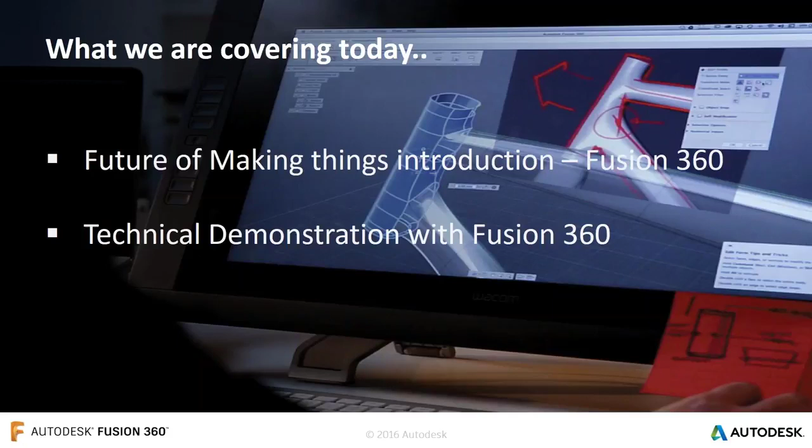So just a quick overview of what we term the future of making things. We've visited a lot of our customers, and a lot of our customers work in a very similar way to each other. They start off when looking at product development with a concept phase.

So these can be, pardon the expression, fag packet sketches. They could be very quick concepts, maybe some rudimentary 3D models. They then move this into a more production level design, adding all the dimensional constraints with the product itself, looking at creating all the drawings, PDFs, bills of materials.

Then they move this into production, so this could be a mixture of what we term subtractive manufacture, looking at CNC manufacturing of components, or even going down the process of mainly assemblies and bits and pieces itself. We then move this into selling that product, and then finally operating and retiring that product.

Now, with that, we can quickly and easily see that it's a very linear process to the design itself. It's very structured in its nature, very siloed in each of the actual products itself. We term this here a traditional product lifecycle, and it has what we term a fixed product value, because around the selling, operation, and retire phase, we're having to rethink the concept, design, production phase, since we're having to rethink that next generation of product.

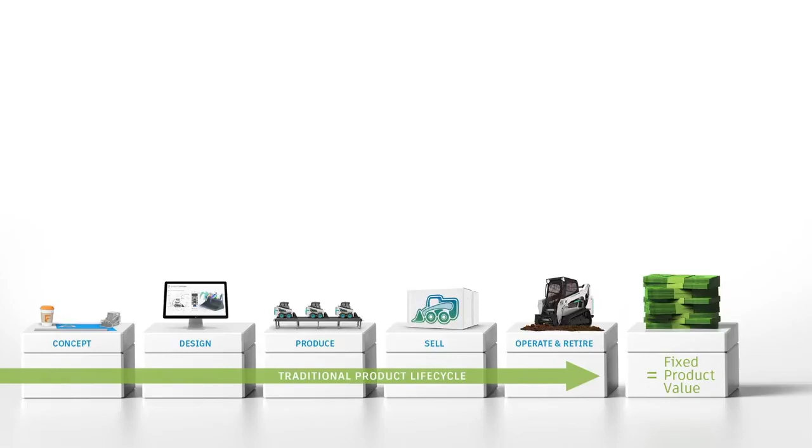Now, here at Autodesk, we look at this a little bit differently. During that concept phase, we have a bit more of a broader reach, so we can go ahead and customize the product a little bit easier to what that customer would like, whether that's color changes or small changes to the product to suit that customer.

We can then go ahead and use virtual teams. They don't have to be in the same geographic location, they could be dispersed around the globe, but we can quickly and easily start to collaborate with them, bringing in ideas from manufacturing, from production, from sales, to quickly and easily start to develop the next generation of product.

We can handle flexible manufacture, so not tying ourselves down to the route of subtractive manufacture, but also bringing into account all the 3D printing enhancements that have been happening recently. So having the ability to maybe metal or additive 3D print something and run some final machining toolpaths on that.

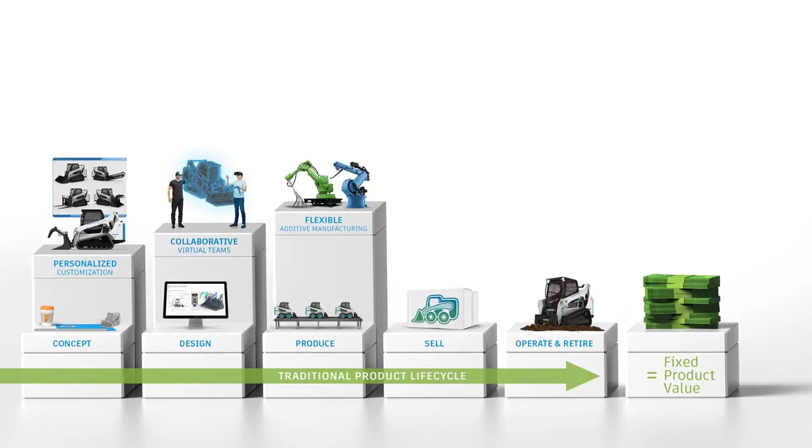Moving this into the sales phase, the customer's a little bit more engaged and the product's a little bit more personalized to them because we've customized it at the start. And finally, having the ability to connect that product to IoT and Industry 4, and having the ability to look at that product, how it's being used in field, to then go ahead and inform the next generation of product, or even start to look at some preventative maintenance.

So this gives us what we term product as a service. We're not just selling our products anymore, we're also selling the services that go with it, with regards to stuff like preventative maintenance and also data capture. And it gives us what we term an increased lifetime value, because all of that data that we capture from that product within field, we can start to plug back into our design at an earlier stage in the process, giving us the future of making things.

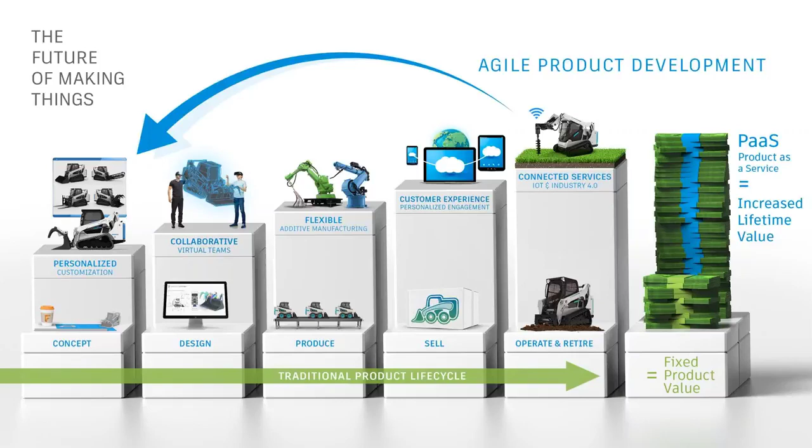Now, with that, all of this sits on what we term the product innovation platform. We can start to work with those design silos.

So starting to look at concept design, we can then go ahead and move this into production, start to look at PCB design, how we can then push that into mechanical CAD instead of leaving that within ECAD. Having the ability to virtually test something, moving this into the make space and actually create that product, and then finally the use phase and connecting that product up to IoT and Industry 4 to quickly and easily go ahead and start to inform that design decision a little bit sooner.

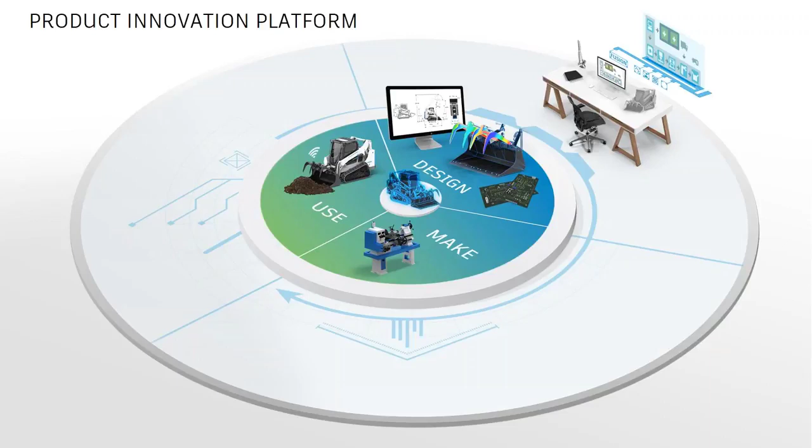From here, what we can then go ahead and do is start to build on that. So bringing in those collaborative teams during the design process to quickly and easily start to get that very quick and easy, or a broader reach, so we can go ahead and have a detailed manufacturing process further down. We can again bridge that gap, like I said earlier on, with additive and subtractive, having the ability to quickly and easily use that bridge between 3D printing as well as our standard techniques such as subtractive manufacture.

And looking at IoT, not just analyzing the product while it's out in field, but also analyzing how the product's being manufactured while it's still with us, and starting to look at machine utilization and how we can then go ahead and make sure that we're getting the kind of throughput that we need from our production floor.

So giving us a really detailed platform of products that we can go ahead and start to look at generating this next generation of product. And this is what we term an integrated product development platform. So a single platform to take our design from concept through to production, what I like to term art to part. And you'll hear me use that often within the webinar itself.

So we start off with form, so we can quickly and easily start to generate those concept models, move this into functions, start to create those production level designs that we need, 2D drawings, check for fit, form and function. Move this into fabrication, so obviously manufacturing the product, and finally managing that and making sure that all the versions and bits and pieces are captured as we go.

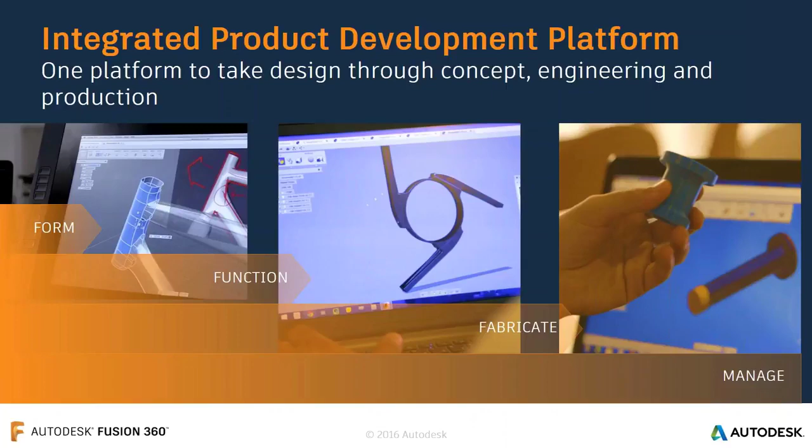Now, just a bit of background on why we built Fusion. We went out to our customer base in the actual market and said, okay, what do engineers and designers want from that next generation or next level of CAD tool that they're going to be using?

One of the key things that we found was that they wanted access anywhere. Now, traditional CAD ties you down to a specific set of hardware, and you're tied to that machine, maybe in your office or even a laptop. Instead of that, Fusion 360 works on Mac as well. So you don't actually have a device or a set of hardware specs that you really need to tie yourself down to. From here, we can run Fusion 360 on a Mac as well as a mobile device as well, and we have the ability to work anywhere and at any time.

Fusion is what we term hybrid cloud, so we can quickly and easily go ahead and access our data wherever we are within the world, and we don't actually need our laptop with us to do that. We can quickly and easily start to view and start to look at how that data is moving on within our design teams.

They also wanted us to have a bit more of a connection with different teams. Now, generally what we saw is our design teams are kind of siloed, and then when we move it into manufacture, some design changes need to happen, and it's generally either a set of notes, a piece of paper, or someone knocking on a designer's shoulder to say, look, these changes need to happen because of manufacture.

That's the reason, two of the key reasons why we built Fusion 360. It gives us an integrated platform, which we'll show you in a second. It gives us the ability to connect a whole host of virtual teams within Fusion or within the business, and also gives us accessibility anywhere in the world. So it gives us that complete 3D CAD that we need when we need it, on demand.

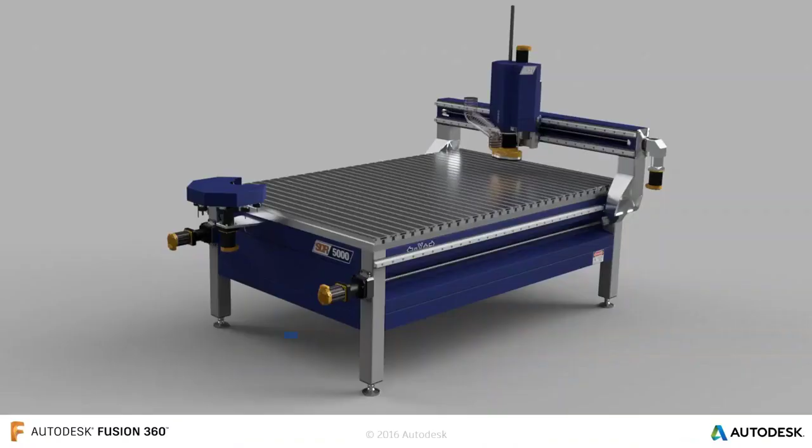So let's jump into the technical demonstration of Fusion. We're going to concentrate this demonstration on the new functionality, sheet metal, which was released on August 8th this year. We're going to focus on some key areas. We'll look at this router table, and specifically the actual router head, and create the sheet metal components for this section.

So these areas just here: the cap at the top, this front sheet metal component, and this one at the bottom as well. We're going to look at how we can use this within Fusion itself.

We'll initially look at the sheet metal functionality, how we develop a sheet metal component within Fusion, some of the sheet metal tools within Fusion. We'll look at some of the rules, how we can override those, creating flanges and bits and pieces. We'll then move into what I mentioned before, our communication layer.

How we can communicate this design out to other people within the organization. We'll then look at how we can take that design and use some of the simulation tools within Fusion to quickly and easily test the design and make sure it's fit for purpose before we manufacture.

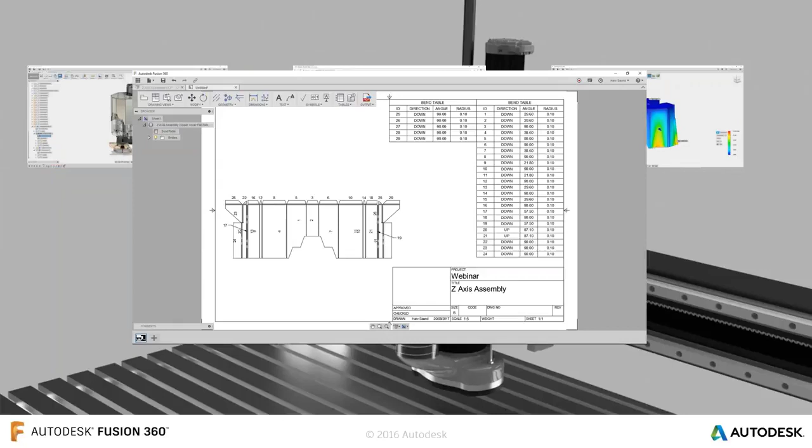We'll start to look at the flat pattern and the actual drawing, creating the bend table within Fusion as well — a real quick and easy way of doing that. We'll move this into the render space, so we want to create a nice visual for our customer, and we'll go ahead and do that.

And then finally, we're going to finish up with the CAM, looking at how we can manufacture that product. So in effect, what we're going to do is take a design from art to part, giving us that complete area we can then loop through.

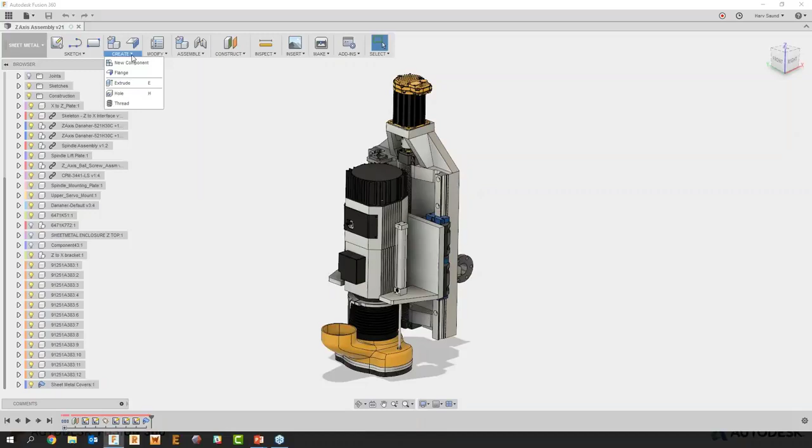We start off with our sketches on the left. We then have the option to create new components and flanges. We have the ability to look at sheet metal rules. And if I expand each of these, you'll see specific sheet metal tools, such as unfold, and also the option to create a flat pattern. So I'm going to go ahead and start off — I've already created a quick sub-assembly for our sheet metal covers just here.

And there's a reason why I've done this, and I'll show you later on. But first thing I'm going to go ahead and do is create a sheet metal component.

You don't have to do this, you can just start off with a sketch. But I like to organize my browser on the left-hand side of the screen, so that's one of the reasons why I'm going to do this. So I'm going to call this upper cover.

At this stage, I can start to specify the sheet metal rules that I want to use. We have a standard library of rules that we can work with, or we can have a couple of customized rules as well. Each of these will start to look at specifying your thicknesses, K factors, bend allowances, conditions for the bend, relief statuses, and bits and pieces.

So I can set these just here, and I'm going to set that for this design. But if I want to modify any of those, I go up to my sheet metal rules, and from there we can start to see steel, aluminium, we have a library, and then you have the option to edit or even create a brand new rule.

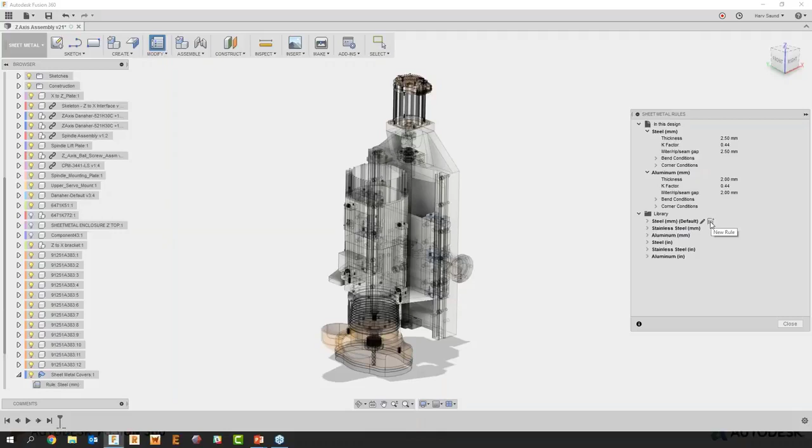So you can set this to the machines that you guys are using. So if you're going to be using specific press brakes, you can go ahead and work with those with the tooling that you've got for those press brakes.

For this design, I'm going to start off with a sketch. I've already created a few sketches that I'm going to use, and I'm going to snap to a top view so you can see the sketch. This is the sketch I've created, just a couple of offsets from a couple of edges of the design so that we can capture the absolute outside limits of that design. Using this sketch, we're going to quickly create that first sheet metal component.

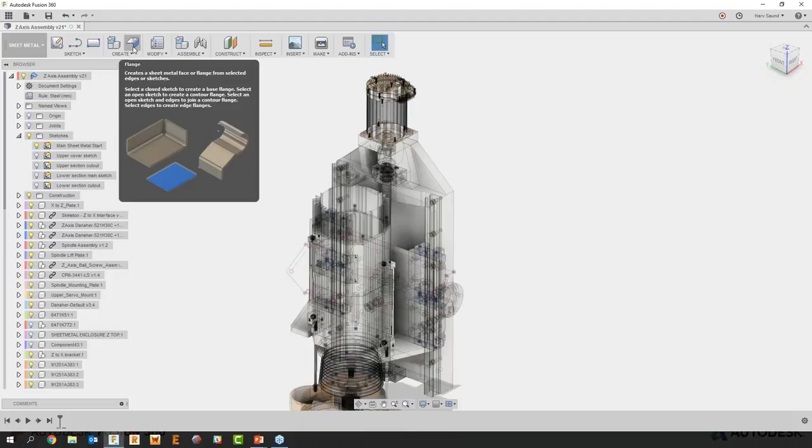And we have a single flange tool to do that. Our flange tool will start to look at creating base flanges, contour flanges, open flanges, edge flanges, so on and so forth.

So if I pick up on our flange tool and specify a contour or a sketch edge, you'll notice that it's open, so you don't actually need to have a closed contour to create the first flange itself. You can quickly and easily, very visually, grab and drag and start to create the flange that you want to use.

Now I want to snap to a specific height because this flange is going to finish at this face here. As soon as I hover over it, it will give me a size that I'm going to snap to. So I'll snap to that.

And I can also go ahead and set a value for this. So I'm going to call this -12.5. And from there, I've hit enter, and we can start to see that flange being created.

I can come back here, edit the feature, and we can start to specify some extra options. You can also do this when you go ahead and create the flange. I was just a little bit too quick with my enter key, so I pressed enter the first time round.

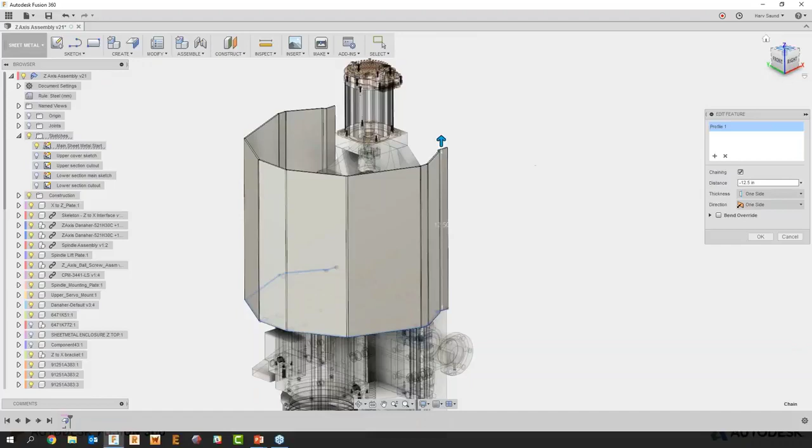So let's go ahead and set a couple of options for this. At the moment, the sketch itself is sitting on the inside, and our flange is sitting on the outside. Now I actually want the flange to sit on the inside of that sketch. So on the right-hand side of the screen, I can specify my thickness direction - whether this is on one side, whether it flicks to the other side, or whether it's symmetric, so the sketch sits in the center of the actual flange itself.

That's totally up to you how you want to do that. I'm going to go for the other side, so it sits flush with the actual component itself. And then at this stage in our dialog box, we have the option to override the bend radiuses as well, and again we have the option for extrusions and bits and pieces. So it gives us the ability to very quickly and easily specify that first flange that's being created within Fusion.

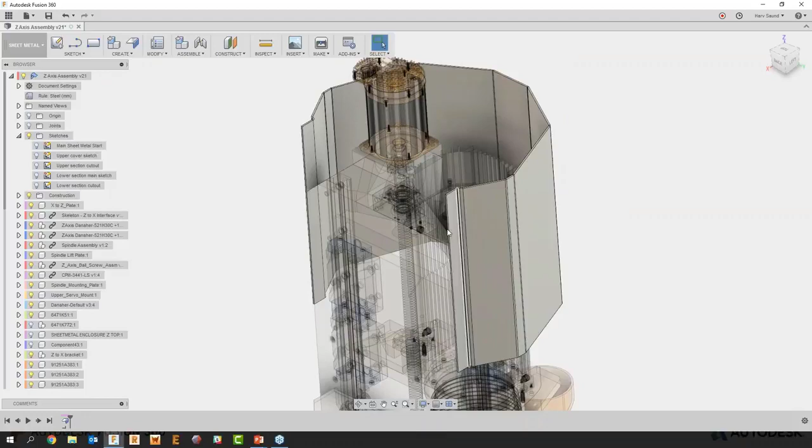So great, we've already started to create that sheet metal component. Now one of the key things I want to do is take this component and make it a little bit more complex than it actually is. I want to grab a flange on this edge, and as you can see we've got a slope on this side at the back just here, so I want to match that slope and create a flange that's just in this top section. I'm going to go back into that flange tool.

If I right click, I have my flange tool on my gestures menu, and from there I can pick up a couple of edges just here and here. With that I can just grab the arrow and drag. Now I like to do things visually, and as you can see with Fusion, you can do it very visually. Very quickly and easily you can start to create those flanges.

Now they're going the wrong way, I want to flip them. I have two options: on the right hand side of the screen I have the flip option, so I can flip that the other way, or I have the rotation ring that I can use. This is very useful, and I use this more than the flip option, because I can actually visually see if I want an angle on that design. Very quickly and easily it gives us an easy and visual way of utilizing that. A great tool just there for Fusion.

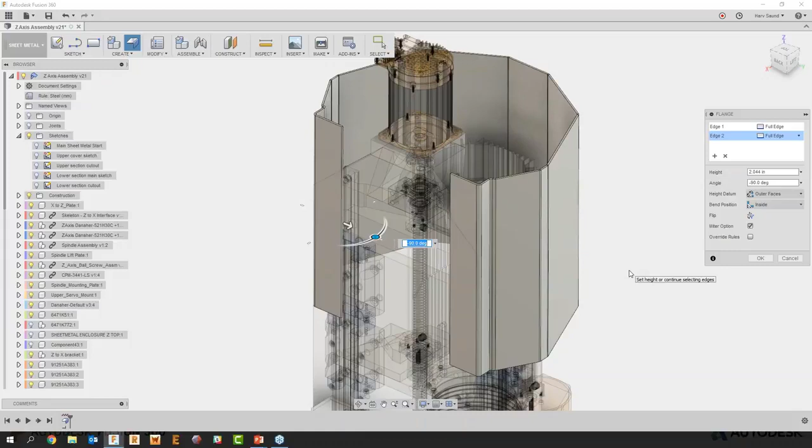Now again, I can go ahead and start to specify the overall distances that I want. I want this flange to be 4 inches, and from here I can start to specify our bend positions, so whether it's inside or outside. We can start to specify a height datum as well, so where we're measuring that flange from. At the moment it's set from outer faces, so it's going to measure it from this face just here to the edge. If I wanted inner faces, it will measure it from the inside edge to the outside edge itself.

So it gives us the ability to quickly and easily start to limit those and change those as we need to. If I snap to a back view just here, as you can see the flange finishes just short of that top pillar just there, but it is actually a full length flange. Now in traditional CAD, to change that flange we'd start to look at maybe adjusting sketches, or even coming back in here and starting to create smaller cutouts, and maybe the flat pattern may start to fail. We'd have to start to create potential relief cuts in certain areas. With Fusion, we've kind of changed the game with this.

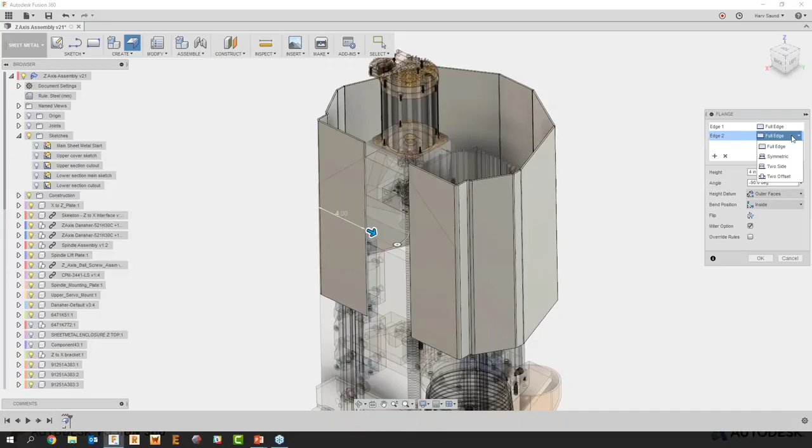On the right hand side of the screen within our dialog box, we actually have every flange considered its own. So from here we can adjust the overall parameters for the flange, the size of the flange individually from each other. For edge 2, which is the one I've got selected just there, I can go ahead and say that's either going to be a full edge, or I can make that symmetric. If I grab one of those arrows just there, you'll notice I can extend past the extent of the flange.

And the relief options appear as they should do, or I can come back in and again those relief options appear as they should do. So very quickly we can have that symmetric flange either side from the center. If I wanted that to be maybe two-sided, so an offset where one side's longer than the other, or even if we wanted an offset where one side overlaps the edge of the flange and the other side is centered or inside that, we can go ahead and do that very simply within Fusion.

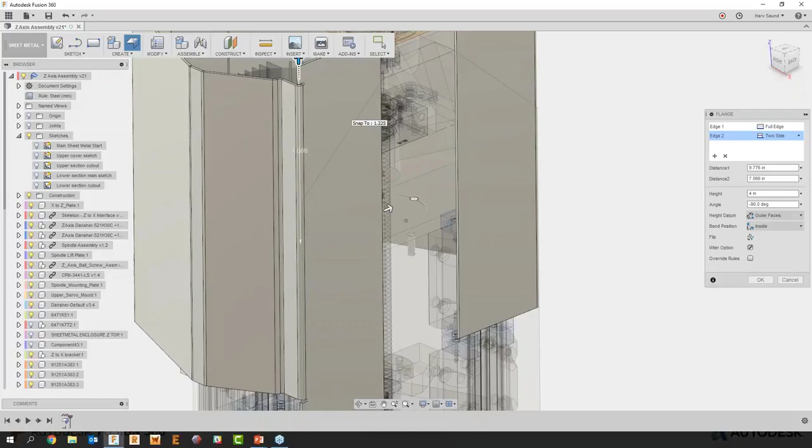Again, I'm using the arrows on screen. You do have dimensional control as well. Or we can go all the way and say that flange can be slightly longer. We also have the option for 2 offsets, so you can specify a reference edge or a point that you want to use, and you can specify where that flange is going to be within that point. I'm going to go back to a full edge just here, and maybe what I want to do is use two sides. I can actually go ahead and bring this side down because that's going to be flat to there.

What I want to do is bring this side back up again. So for that, I'm going to make that -2 inches from the center. That's then going to create a flange that is slightly off from the edge or the end of that slope, and also put in the correct relief cut that I need. When we go to flat, it will be correct for that.

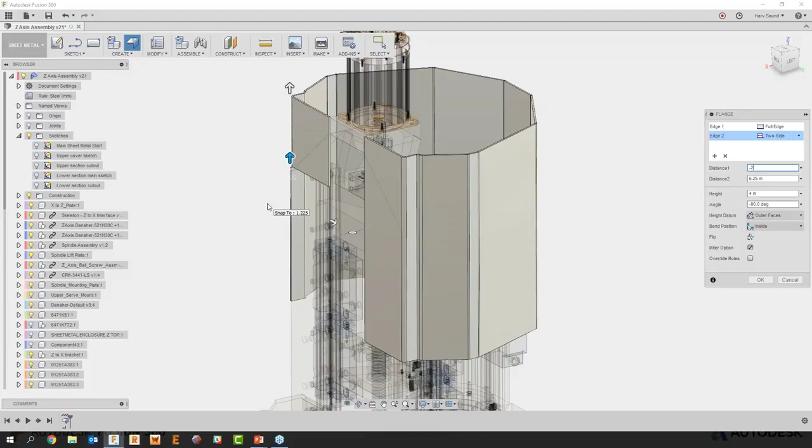Now you'll notice that's only occurred on the left hand side of the flange we've created. We have complete control, like I mentioned, on the other one, so I can quickly and easily specify this flange to be slightly different. It gives us a quick and easy way of creating two flanges within the design that are different from each other. In traditional CAD, it would be very difficult, or could be quite tricky with a lot of steps.

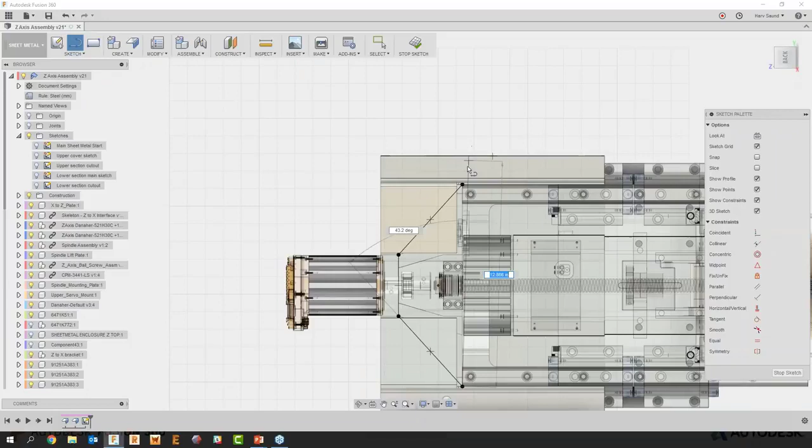Now I want to create that slope, so we can come back in and start to use our sketching tool. I'm just going to pick up on my line tool, and make sure I pick up on the correct point that I want to use, which would be that one there. We'll draw out the relative shape we want to use to create that cut. Using press pull, I can quickly and easily create that cut from our sheet metal component, specifying that I only want to cut the upper cover, which is the component we've done, and it's created that flange for us in the correct form.

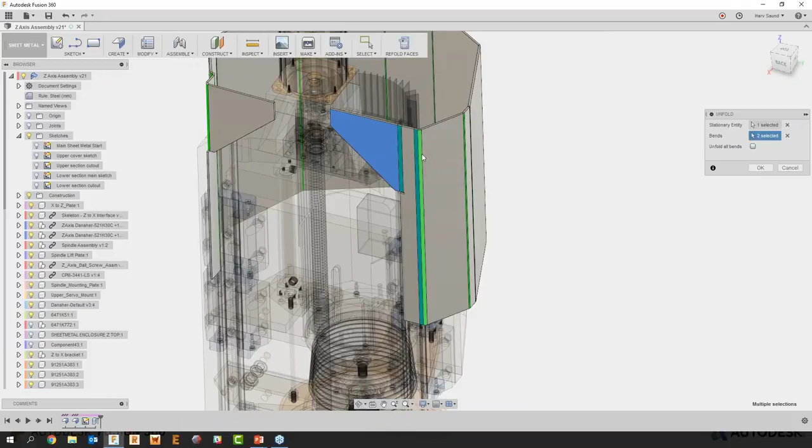One of the cool tools within Fusion that gives me the ability to look at individual areas of the sheet metal component, or individual bends, is the ability to use our tool called Unfold. This will allow me to quickly and easily pick a stationary entity, which would be that one just there, and we can then unfold individual bends from that. If I pick this as a stationary entity and pick that one, it will start to unfold each of those bends itself. We can unfold multiple bends if we wanted to, and start to see how that design develops within the flat. A very nice tool to quickly and easily analyze how that sheet metal component is going to be built if we need it.

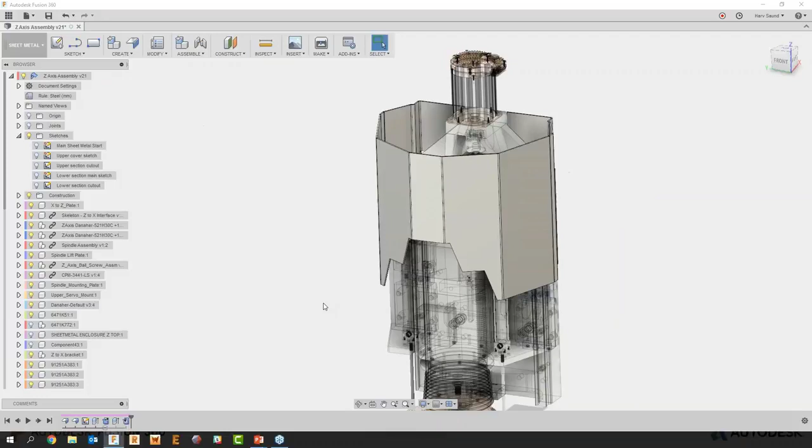Now, using that unfold tool, I want to create a quick cutout on the front, because the cutout on the front is going to be done within the flat. This unfold tool gives us the ability to specify a stationary entity, unfold all the bends, and very quickly we have that component completely flat. From here we can quickly start to create a cutout that's going to be a detail feature on our design. Again, I just want to make sure I'm cutting just the upper cover, and it gives us that just there. Now when we refold, this tool at the top, this is going to give us all the correct fold parameters when we look at the development over the flat. So instead of creating a cutout within the 3D, we can do it within the 2D, which is where this would occur, and then see what the development will be. Great tool there with fold and unfold.

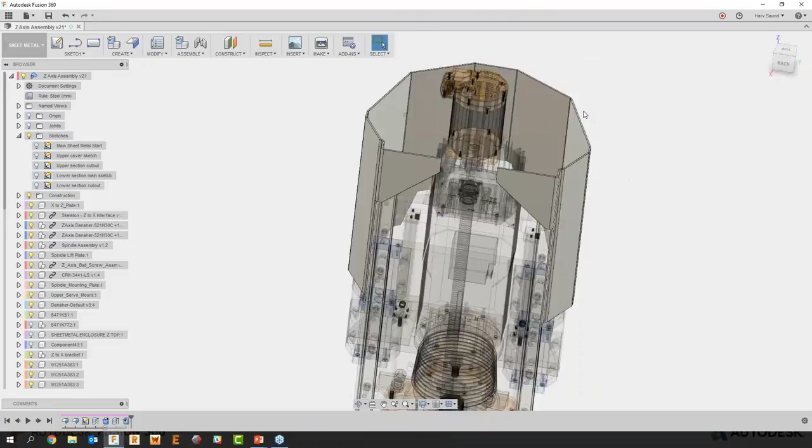Now we want to create a few more flanges, one on the back just here, and then a couple along the top. So let's pop back into our flange tool again. We'll pick up on those two edges just here and here, and again we have the ability to quickly create just those flanges that we need.

So this one, I'm going to make about an inch wide. Actually, I'll make that 1.5 inches, because it makes it look a little bit better. If I snap to a top view, we're going to quickly start to see where these flanges are. Now these flanges actually match up with this edge, but we've got a block in place. So what I'm going to do is maybe move those outside to that bend.

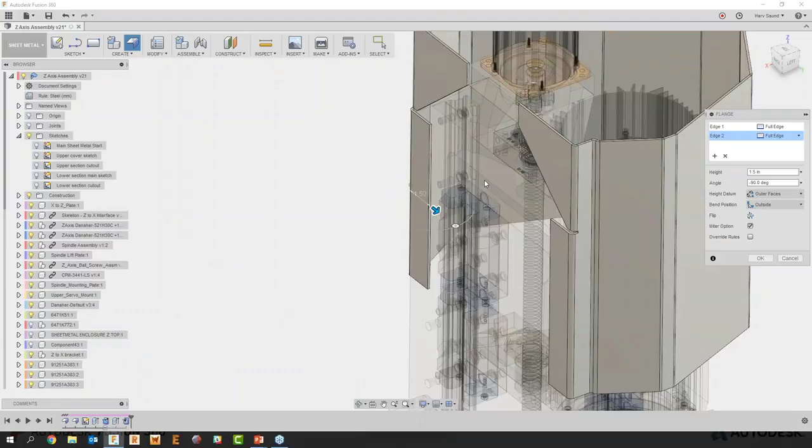So that will go ahead and allow us to match that face up to this inside face itself. When we come out of the component and activate a higher component, you start to see that. So very quickly we've created that one.

Now we also want to create some tabs along the top. I'm just going to pick up on a few of these edges. Let's pick those again, because I've done those in a different way. Let's go for the inside edge instead. You can reselect from the dialog box if you wanted to, but I'm just going to go ahead and reselect the ones that I want, so let's go for these just here, and we'll pick up on all these internal edges.

There we go. One of the cool things with this flange tool in Fusion is I've picked all of those edges. In traditional CAD it would be quite tricky to create all those miters within the design, but Fusion does that automatically for us. If I make those flanges, say an inch wide or an inch in thickness, it will do all of the miters for us, as you can see just here.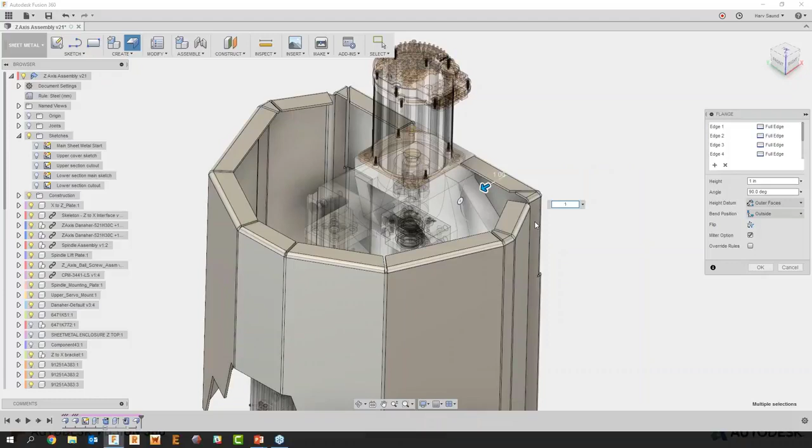And what we can then specify is where that flange would sit. Now we're going to have a top cover, and as you can see, that's my back panel just there. So I can quickly and easily flick these to inside, and that's the top section where my cover is going to sit.

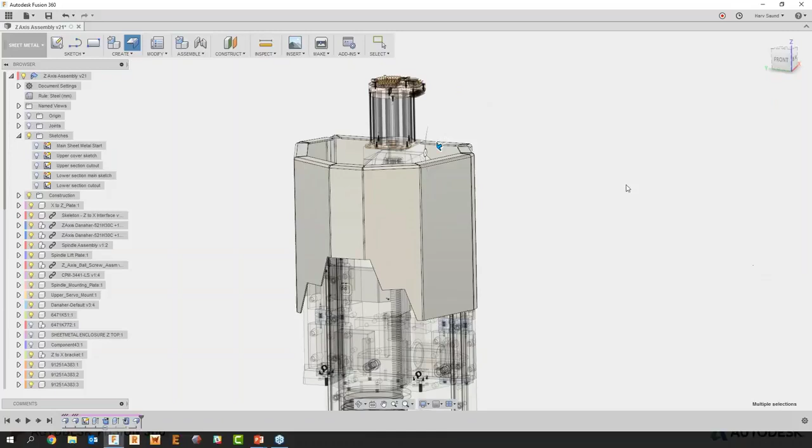So very simply, very visually, we can create sheet metal components within Fusion itself. And that's our first component done.

Now, what I want to do is maybe create a flat pattern at this stage, just to check that design. So I can pick a stationary face, and very quickly the flat pattern is created.

Now within that flat pattern, we can start to see all the bend lines and bits and pieces within that design. I'm going to be using this flat pattern in two forms a little bit later on - we'll look at this in the drawing environment with bend tables, and also in CAM. But I'm going to leave this as it is for now.

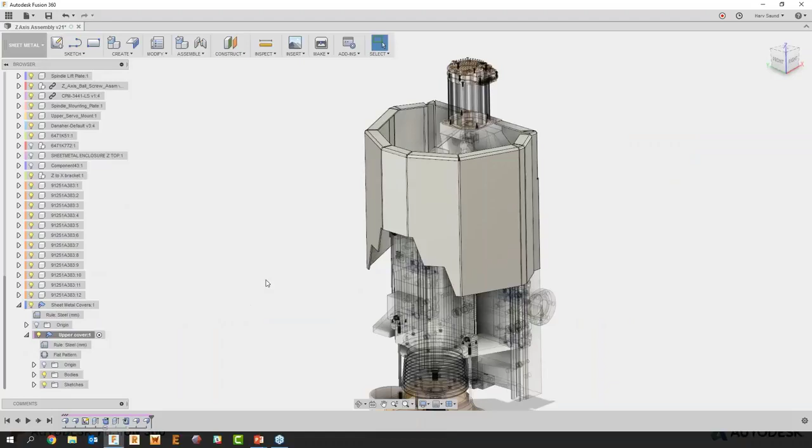So if I exit the flat, we're back just here. And if I want to activate that flat at any time, I can find that flat within the browser, and we have the option to activate at this stage, and it will take us back to that flat pattern.

Now, we're going to develop this design further because we want the top cover and also the one below it. So let's create a couple more components. I want to specify maybe our sheet metal covers as our top level, and I want this to be the top cover. We'll keep those same rules.

Now I'm going to use a sketch that I want to use - this one is a closed contour. We can quickly use closed contour sketches to easily create the overall design itself, so I want that one just there. There we go, our profile selected.

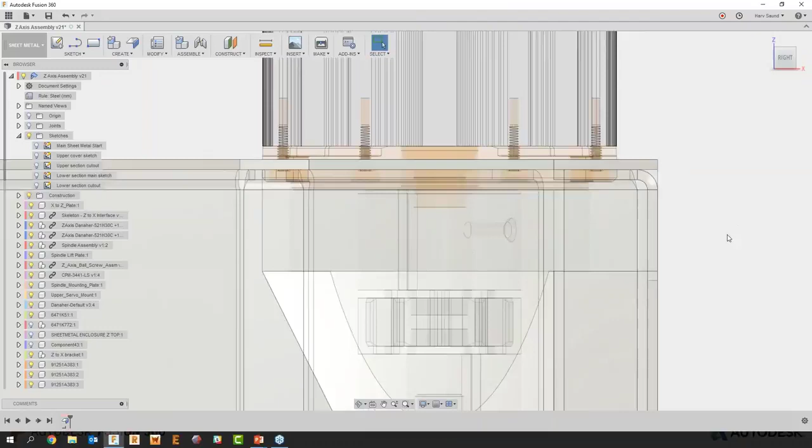And very simply, we can create that sheet metal component, and it will add the thickness where we need it to be. Now that's a very simple sheet metal component, but it is still a sheet metal component that we're going to work with.

And then finally, what I want to do is create the lower section as well. So again, I'm going to create another component - I'm going to call this lower cover, and again specifying some sheet metal rules. If they're going to be different for this component, we can have them different. And I've got some sketches I want to use, so I've got a lower sketch just here that we're going to work with.

And again, just using that flange tool, we can quickly pick up on that sketch, and we can drag that up. So this one itself is actually going to be 11 inches tall.

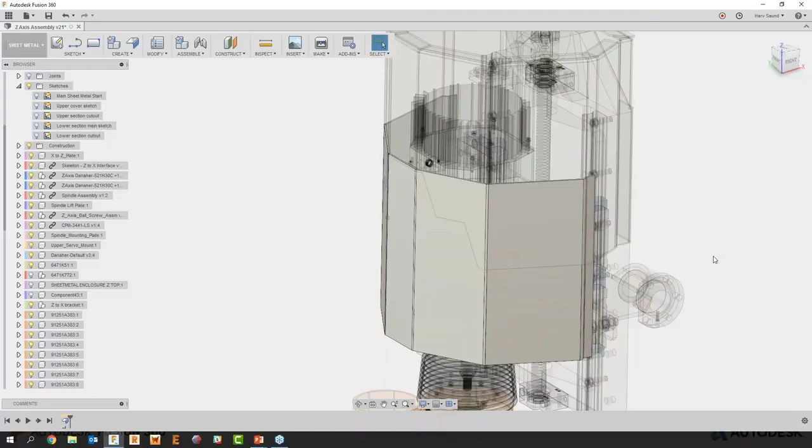So again, it covers the actual design itself, and this router is currently at its lower position. Now what I can see is I've hit OK. I'm very quick with my mouse, but the actual covers overlap, so I can always come back into my timeline at the bottom, edit that feature, and start to specify where thicknesses and bits and pieces occur. That works exactly like any other feature within Fusion itself.

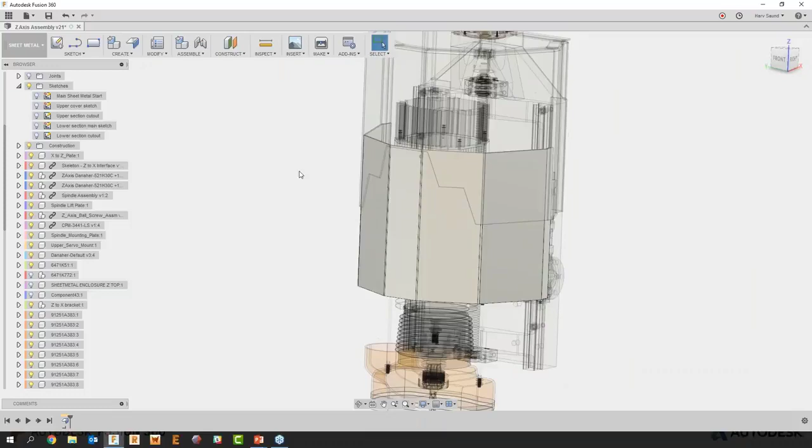Now from here, we want to develop this design a little further. So what we're going to do is add a few flanges to our design. I'm picking up on a couple of edges that I want to use - that one small one just there, and maybe this small one just here. I can go ahead and move those out, but I also want to put a bit of a tilt on these instead, so they're at a specific angle and just taper in slightly.

And what I've done is I've missed an edge. Not a problem - over on the right hand side of the screen, we just hit the little plus icon or hold down Control on your keyboard, and that will go ahead and create that edge for you. Again, you can start to specify those distances. I'm going to make that minus 40 degrees, so it makes a very nice finish to that design.

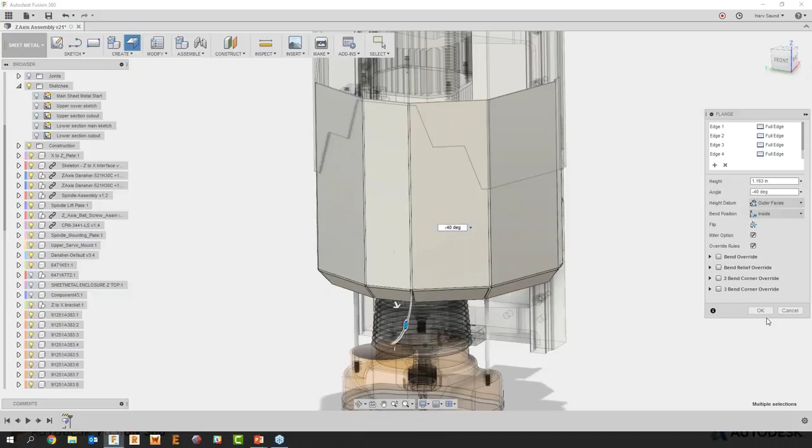Again, at any time we can override any of the rules for those flanges. If there are specific relief options you want for this flange, you can specify those. You can specify your bend overrides, so what your bend radiuses are going to be, your 2 bend corner overrides, and your 3 bends as well.

So once that flange is created, great, our design's done, but we also need a slight little detail on this design as well. So again, coming back into that unfold command, we'll quickly and easily unfold that design, and using a predefined sketch that I've created, we'll quickly and easily create a cutout for this design as well. And again, I only want to cut the lower cover, and very quickly and easily that's done as well.

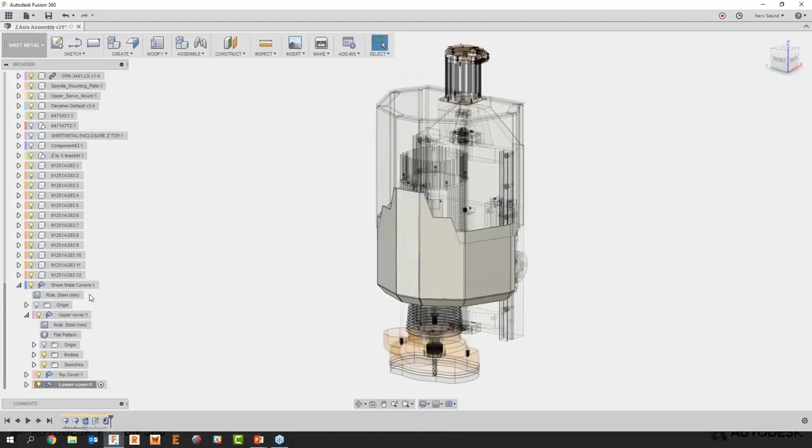We'll refold, and then when we go ahead and fold this design or create the flat for this design, specifying that stationary face, you can start to see that that flat's created as well. So very quickly and easily, we can start to develop different levels of sheet metal component within Fusion itself. And if I just go ahead and activate our top level design itself, so let's go for our sheet metal covers just there - our sheet metal cover designs are done.

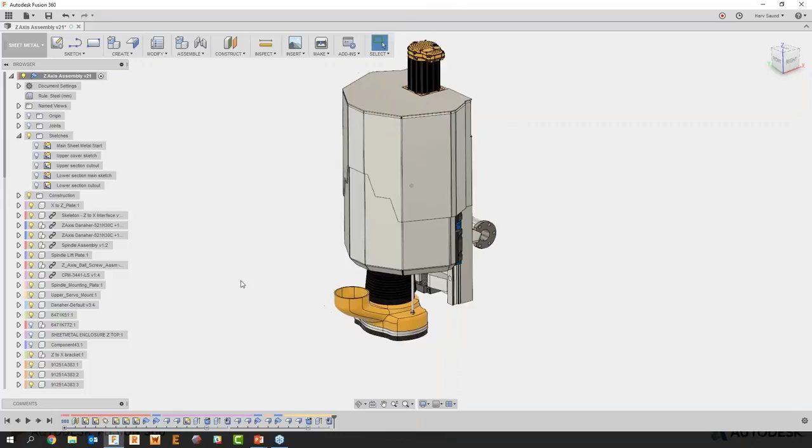So very simply, using that single flange tool, we've been able to go ahead and create a whole host of different flanges within Fusion, also create a whole host of different flat patterns within Fusion, and have the ability to quickly and easily start to develop a whole host of different designs directly within Fusion. So our Z-axis covers are actually done very simply within Fusion itself.

So it gives us the ability with sheet metal within Fusion, a quick workspace switch. We can pick up on open or even close contours to quickly and easily start to drag those contours, creating the kind of flanges that we need. We start to specify the type of edge conditions for those flanges, having the ability to quickly and easily go ahead and specify different edge conditions.

So whether the flange extends past the actual edge of the flange that you're creating, or even looking at having symmetrical bits and pieces, we can go ahead and angle those flanges very visually within Fusion, and we can quickly and easily start to specify any bend positions, datums for heights, and also all the rules that we need to then go ahead and manufacture the design itself.

So moving on a little, we may want to go ahead and start to look at communicating that design with someone. So we may want to look at how we can open this up to the broader team and start to look at how we can communicate the manufacturing methods or even the flat patterns directly to someone else within the actual business itself. So let's jump back into Fusion. Let's go ahead and take a look.

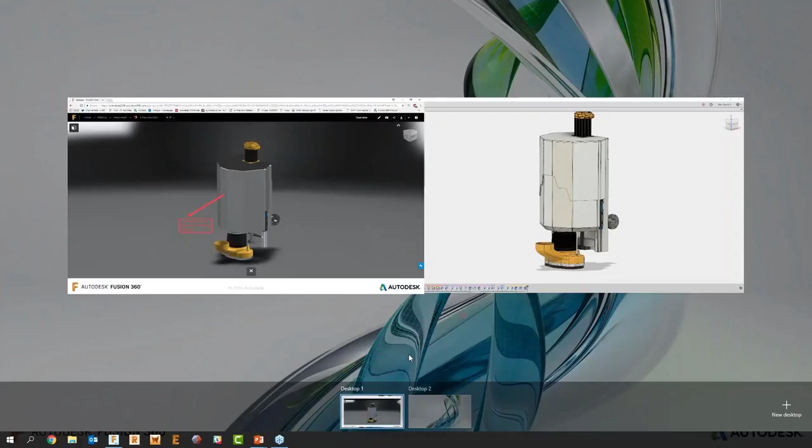Now within Fusion itself, down at the bottom left hand side of the screen, we have a comments tab. From here we can start to look at creating CAD collaboration with whoever we need.

From here I can go ahead and specify just a very basic comment, or we can specify comments on a specific object, or even comment on a specific point. So if I comment on a specific point just here, we can say sheet metal covers done. What do you think?

And if we post that, this is going to go ahead and post a comment for us, giving us the ability to quickly and easily pull in different teams and collaborate with different people within the business itself. So this is just uploading at the moment, and it's going to take a snapshot of the image we've created.

It will upload it, and from there we're going to look at how we can view that comment and how we can start to engage other people within the design process. So we have that comment uploaded.

Let's go ahead and open this design up within a web browser. Now, one of the key things for us with Fusion itself is that we don't actually have an install for viewing designs. So you don't have to install anything to view it.

It's all there ready for you within a web browser or even a mobile app. So if I pop back a level just here, I can see all the options for all the parts we've got. We can see who the owner for those parts is, and who's actually using that component itself. If I go back into that Z-axis assembly, I can see all the parts being used within that component, what that design's used in, and any drawings created for it.

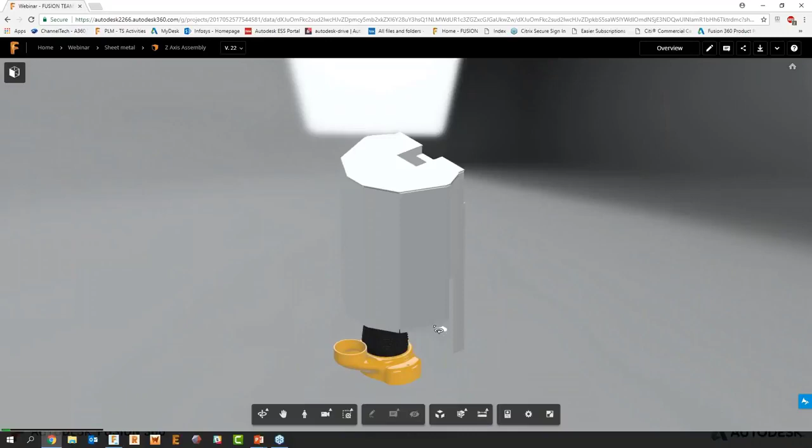But if I hit the view tab, this is going to start opening up our view tool. One of the key things with Fusion is that we have all of our versions along the top - I've actually developed this design to 22 versions. So every version within Fusion is captured, and if you ever need to go back, we have the ability to do that.

So from here, I can see the sheet metal covers done note within the actual web browser itself, and I can see any comments that are captured - we can see that directly on screen just there. We can also show that in a feed, and start to see what comments are captured at what version, giving us the ability to quickly and easily capture an audit trail.

Now, if I want to comment back on that design, we have the options down at the bottom to do red line markups if needed. So if I wanted to pick maybe an arrow, we can put an arrow in, put some text in, and say 'looks good.'

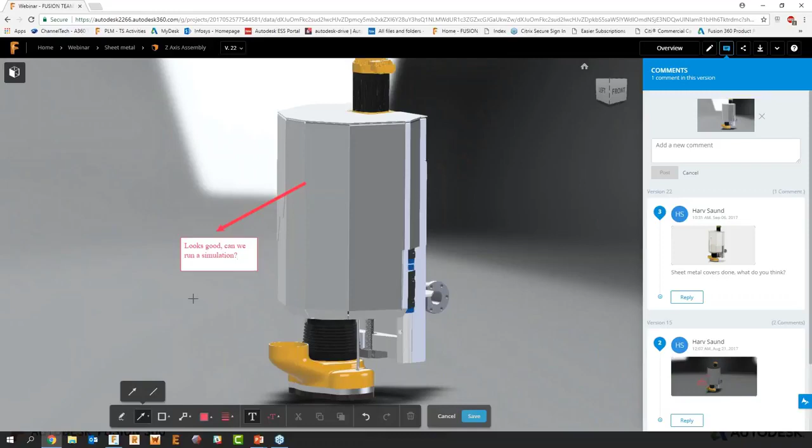Can we run a simulation? It's a very vague comment to have, but we'll go ahead and save that, and that will create a red line markup for this design.

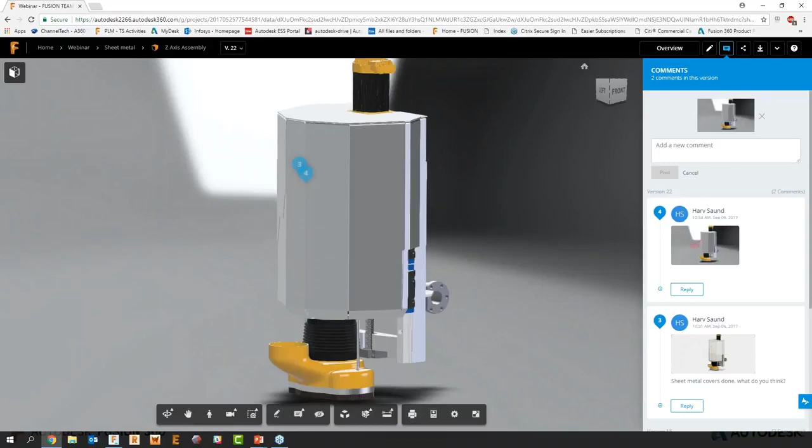Sharing this design with anyone we need, whether that's manufacturing, outside vendors, or a sheet metal fabricator, all bits and pieces, we can quickly and easily do that via a web browser. No need to install anything. So I've created that comment, and as you can see, it's posted on the right hand side of the screen.

But if we pop back into Fusion and I come back into this comments tab, it's automatically updated within my Fusion browser as well. From here, I can quickly start to see that snapshot once that's loaded with that design, and then we can see how that design needs to develop using our communication tools.

So again, opening up sheet metal design, not just to your design department or your manufacturing department, but very simply expanding this to the fabricators that you're going to use to create the component, and your manufacturing teams off-site, gives you a very simple way of quickly and easily collaborating.

Like I mentioned, this is web browser based, and we're not tying you down to Chrome like I'm using here. You could use Edge, Safari, whatever web browser you're working on, and it's also available on a mobile application. So you can quickly zero in on a mobile app, just in case you're on holiday and want to quickly check that your design team is doing what they should be, and make any comments that you need.

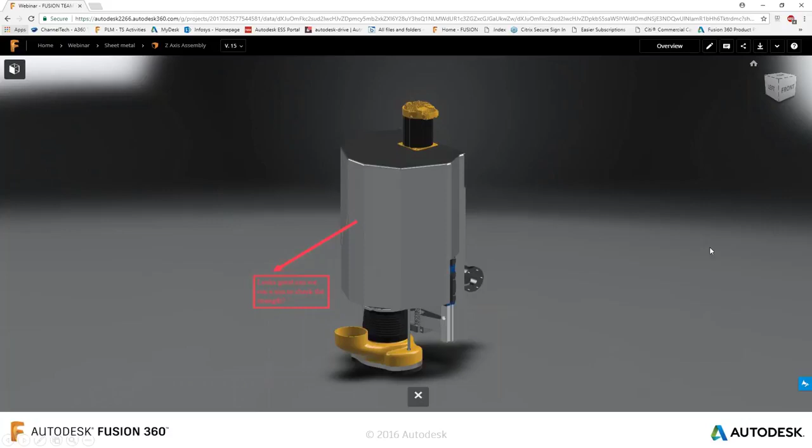Now, moving this design along, they wanted to go ahead and run a simulation. So let's quickly look at how we can take that sheet metal design we've done and pop this into the simulation environment, giving us the ability to use that sheet metal design directly within the actual platform itself.

So let's pop back into Fusion. Now I want to go ahead and create or test this design. I may want to put a 200 Newton load on this face just here, in the opposing, holding it at the top, and start to see what's going to happen when we do that.

So just like anything within Fusion, it's just a workspace switch. We're not activating any add-ons or bits and pieces like that. We can quickly and easily jump into our simulation tools, and from here we can activate a whole host of very high-end simulation tools within Fusion. We have the ability at this stage to do your standard static stresses on assemblies.

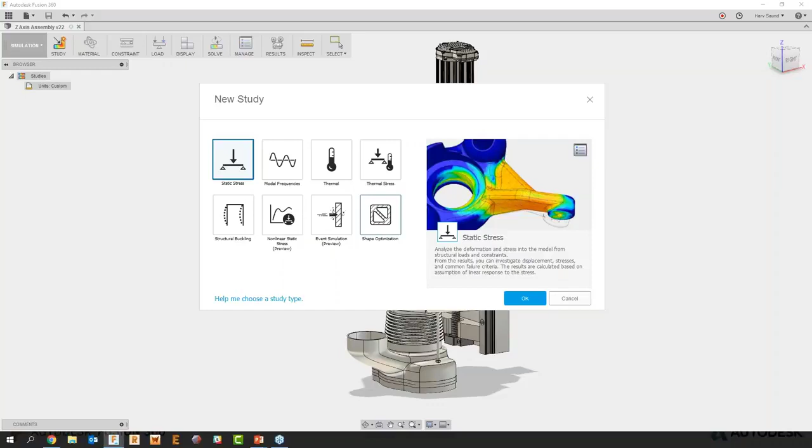We have the option to look at frequencies. Now we mentioned PCBs and bits and pieces earlier, so we can start to look at thermal analysis as well, looking at how heat dissipates. But we also have the ability to do stuff like generative design at this stage, such as shape optimization. So we're going to go ahead and focus in on static stress just here.

And if I click OK, this is going to start our static stress study for us. Now, I don't need to analyze everything, I just want to analyze this top cover or the upper cover and the top cover. So I'm just going to double click and select those two just here, and we'll suppress everything else out of the design. I've just used the right click to do that.

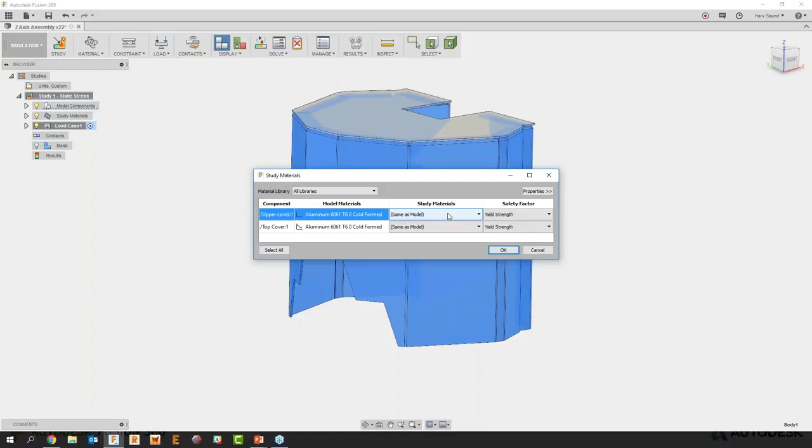So here's our design. Now what I want to do is put a load to this, or set the materials initially. Along the top, we start from left and go right. So at this stage, we can specify the type of material we want to use, whether this is going to be an aluminium or a steel, and you can quickly test the variations between the two and compare them. Now I'm going to leave them as they are.

We can then start to specify some constraints. Now I'm going to fix this at the top face because that's going to be where it's potentially bolted in. This bottom section is going to be a little bit more free, so we can start to specify the loading conditions on those. The loading conditions can be forces, pressures, or moments if you need them to, and I can specify target faces that I want to apply those to.

And maybe I want to go ahead and apply a 200 Newton load, and that's a total 200 Newton load at the moment on both faces, but if you want it on each face, you can go ahead and put a force per entity. If I click OK...

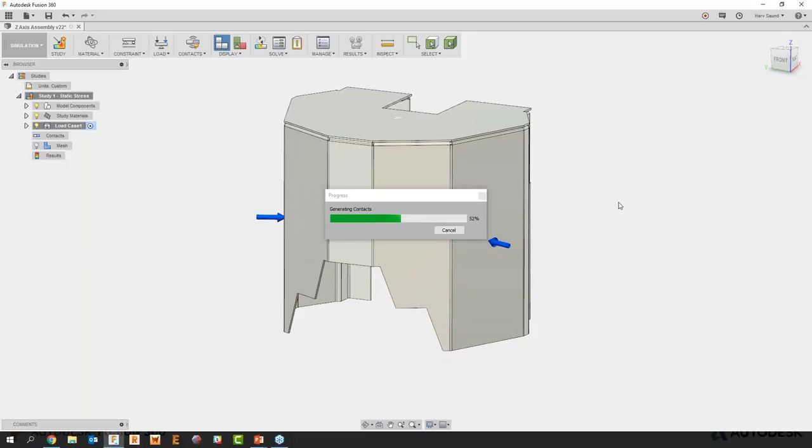We are analyzing an assembly, so we need to go ahead and just create the contacts, which is the interaction between the two parts itself. So we'll quickly go ahead and do that within Fusion, and that's then just going to join these two together.

And then finally, we have the option to solve. Now, before running a solve, we can quickly pre-check, make sure that we've got everything in place. Now, one of the key things for Fusion, I mentioned it earlier, is hybrid cloud.

So you have the option to run on cloud. So if you don't have the hardware on your machine, you can take all the simulation solving and chuck it straight up to cloud. This is then going to go ahead and allow you to quickly and easily solve the design on cloud, and this is then going to go ahead and chuck the results back to you. So you don't actually need to run this locally on your machine.

If you do have the hardware on your machine, you can run this locally. I do, so I'm going to just quickly run this locally and we'll hit solve. And this is then going to go ahead and run a simulation for us.

So what it's actually going to go ahead and do is just quickly mesh the model. So it's going to break this down into small elements. We are working within what we term finite element analysis. And from there, it's then going to go ahead and run the simulation.

And then it's going to go ahead and give us some deformed plots at the end of it to see what's going to happen when we fix that top face and we punch two 200 Newton loads either side of the actual design itself, and see if the part's actually going to fail, or if we need to beef it up in specific areas, if we need to add certain ribs or gussets and bits and pieces within that design.

It'll take a minute or two to solve, just to quickly and easily finish off, and then from there we'll go ahead and start to analyze the results and start to see what kind of results we're going to get for this design. We could, again, like I mentioned it earlier on, push this to cloud and then carry on with Fusion and then start to look at how we can develop other areas of the design.

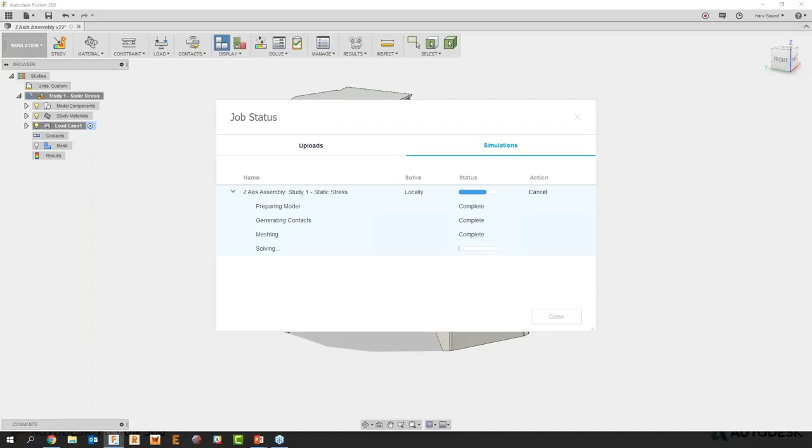And then when we come back, Fusion will then go ahead and give us those results itself, or we can pop back at any time to see those results. So it's going to solve for us. It's going to take a minute or two. There we go. And then once we're done, we'll go ahead and start to look at those results.

So one of the key things that we get straight away is the minimum safety factor within the design, and we can start to see if that design is strong enough to suit the minimum safety factor. So at the moment, our minimum safety factor is 15, so it's very strong within our design.

We can start to look at the strongest areas of the design, and our results detail give us a quick snapshot on what the actual design is going to do. If I start to look at stresses within that design, we can start to see where the maximum and minimum stresses are occurring in that design itself.

And we're actually quite good with this design. It's quite strong. We can start to look at displacements. It's only moving about 0.1 of a millimeter.

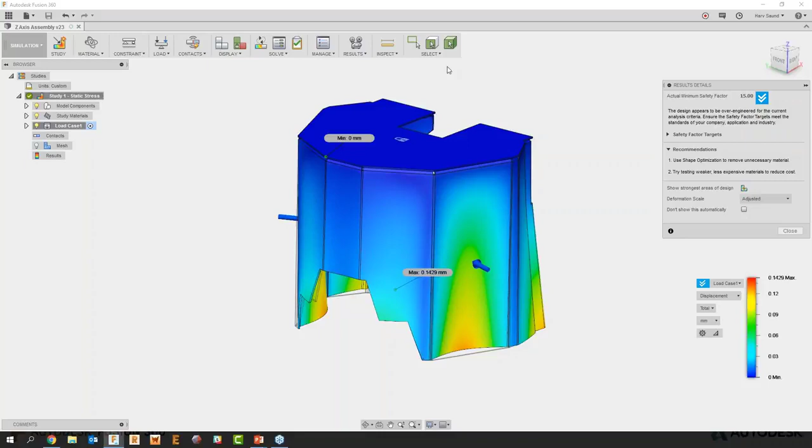Now, at any point, you can animate these designs. So again, if I play that through, we can start to see that design animate as needed.

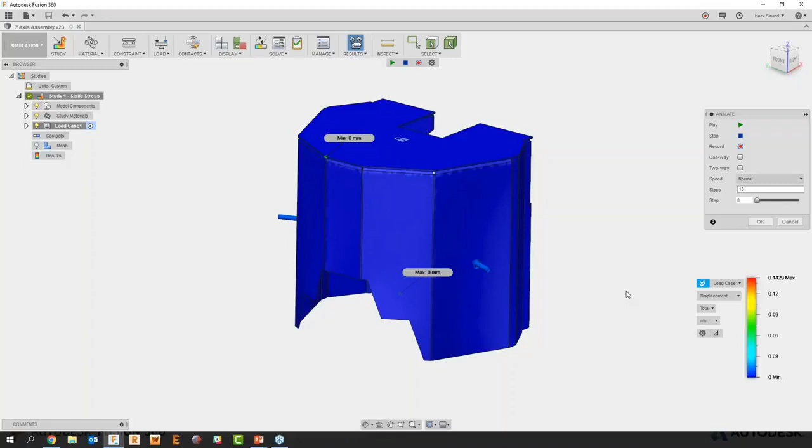And again, just like before, we have the ability to quickly and easily start to communicate this design with anyone, and we can start to view these results within a web browser as well. So it makes it very simple and very quick and easy to then start to communicate everything with whoever you need to within the design itself, or whichever department you need to.

So very simply, we've been able to go ahead and test that design within Fusion. Taking that design, designing the component as a sheet metal component, pulling that into some communication, someone wanting to run a simulation. We've run that simulation and we can see that that design is actually fit for purpose. It's more than strong enough to actually handle the loading that we're putting onto it.

One of the other key things for us with sheet metal components is manufacturing detail. So we need to go ahead and start to look at how we can take that flat pattern that we created earlier, pop it into a drawing, and start to create bend tables and bits and pieces such as dimensions and bend annotations from this.

So let's jump back into Fusion and take a look. What we'll do is jump back into either the model or sheet metal space. It makes no odds at this stage. And we'll start to create a drawing from this design.

So let's create a drawing from the design. We can choose either the full assembly to create, so we want to go ahead and create a GA over the whole thing, or we can specify the components that we want to go ahead and use. I'm going to just pick this sheet metal cover subassembly, and we can either specify the subassembly or a specific component within that. So if I just specify our upper cover just here...

From there, we have the option, because we have a flat pattern available to us, to either create the drawing for the folded model or create the drawing for the flat pattern. Now, when we're in the drawing environment, we can do both.

Once we go ahead and create the flat pattern drawing, we can specify any drawing templates that we want to use, or create a new one. If it's a template we've got existing, we can use that. We can specify the standard we're working in and the overall sheet size. Once we click OK, we're into our drawing environment within Fusion itself.

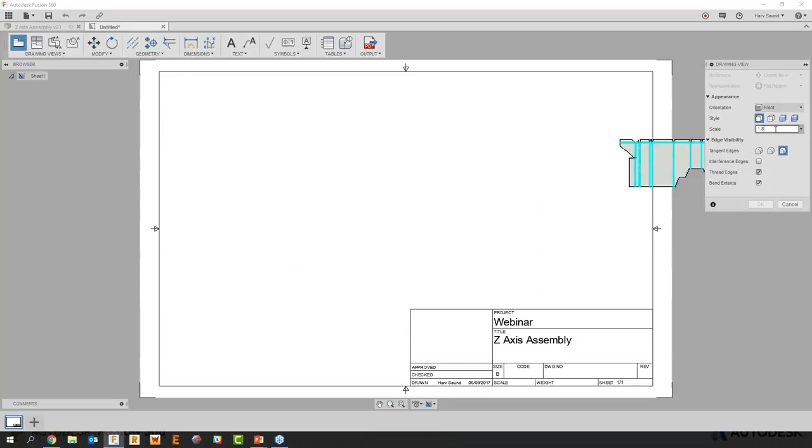From here, we can quickly start to create the design itself. So again, I'm creating the flat pattern view, and I actually want to go ahead and make this slightly larger. So let's go ahead and make this maybe 1:4, make it a little bit bigger. There we go, we'll drop that in place.

Again, we have the option to create this shaded. We can specify any edges and tangent edges that we need to. And if we click OK, that's then going to go ahead and drop our flat pattern in.

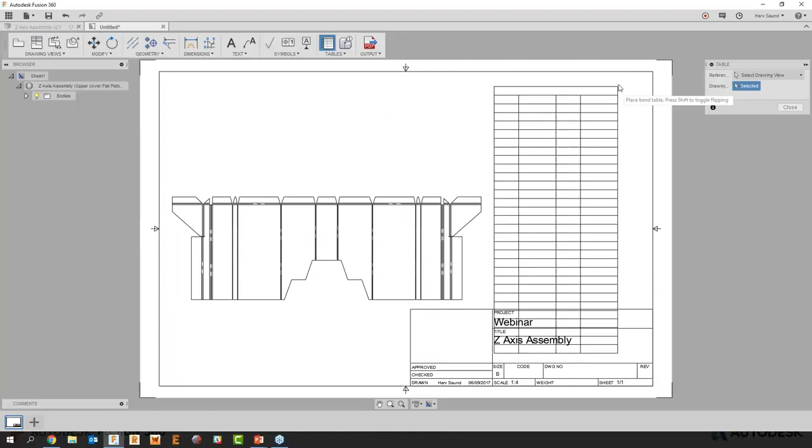Now, our tables tool, especially seeing though it's a sheet metal component, will default to a bend table. So if I specify that bend table in place, all of our bend tables are automatically generated, and all the number sequences are generated as well. And that bend table goes over into my title block.

I want to change that. I'll just grab this arrow down at the bottom, drag this up, and specify that the break for that bend table is there.

Now, as we can see with this, there's a few numbers that overlap. That's not great. So what we can go ahead and do is just grab that number and drag, and what that's going to do for us is quickly and easily move that around. Once we move that around, it also automatically puts a leader in for us.

So again, we're not having to go ahead and do that manually. We can quickly and easily grab any of those bend notes that we've got on the actual flat view and put any of that detail in.

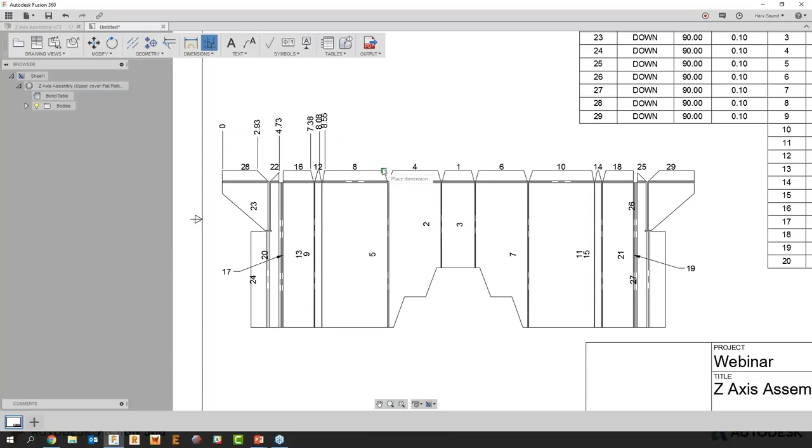Again, from here we have complete control with dimensions. We can go ahead and create some ordinate dimensions if we wanted to, or create some chain dimensions or baselines as we need to. So if I was to create an ordinate, we can quickly and easily start to create the ordinate dimensions we need in place, to then specify where each of these edges or bend edges are going to occur within our design.

So it makes it very simple and easy to create a very detailed bend drawing directly from Fusion itself, especially having all the bend tables and bits and pieces in place. And again, for our output, we have the option to do DWGs, PDFs, or if you wanted to just output the bend table, we can do that as a .csv as well.

So very simply within Fusion, we've been able to take that design from just a standard development or a 3D model development into a flat pattern drawing. From here we can quickly start to specify all the dimensional information, the bend table information, and very simply have the manufacturing detail that we need to pass onto the shop floor to then manufacture that design itself.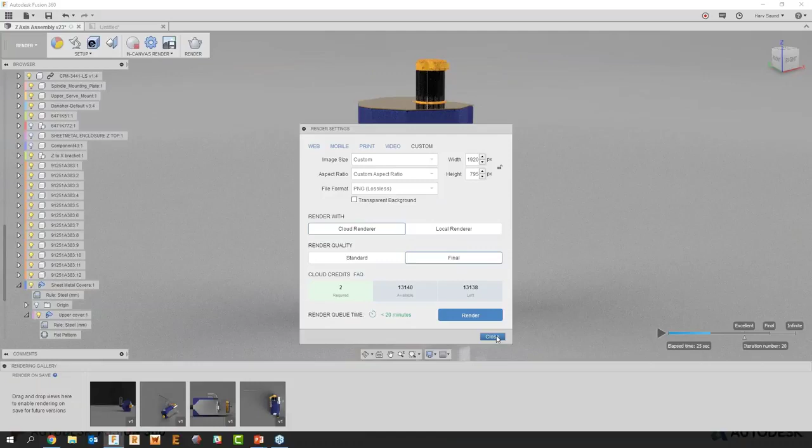But we also can quickly and easily pass this off to cloud. Rendering generally takes a lot of resource, so we can chuck all of the resources up to cloud, let the cloud render it, and this will then return us a result that we can use. But if you do have the resource on your machine, you do have the option to local render as well. So it gives you a very quick and easy way of choosing what you do at that stage, and again, not needing the specific hardware that you need to render on cloud or render locally.

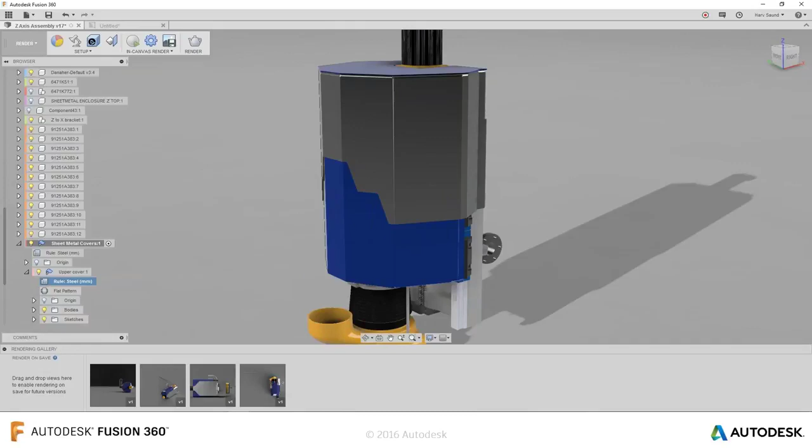So very simply, we can create those visuals for customers as well, making it a very simple, easy process to jump in from a sheet metal component to create the part, look at creating all the manufacturing data, looking at the simulation, looking at communicating it, but also giving that customer a nice visual at the end of it. And then finally finishing off.

Now we've done all the arty stuff, so actually creating the part, looking at creating all the manufacturing information for that part, looking at how that part's going to join to other components, looking at communicating that design, looking at running a quick simulation or a render. But what we actually want to do is create it.

So built within Fusion is integrated CAM tools. We can take the flat pattern that we've generated and create a laser cut or a water jet cut path that we can go ahead and work with. So let's jump back into Fusion and take a look at how we do that. I'm just going to jump back into the modeling environment, and you can see we've pushed those colors back. Let's come back in for our workspace switch just here and go into that CAM environment.

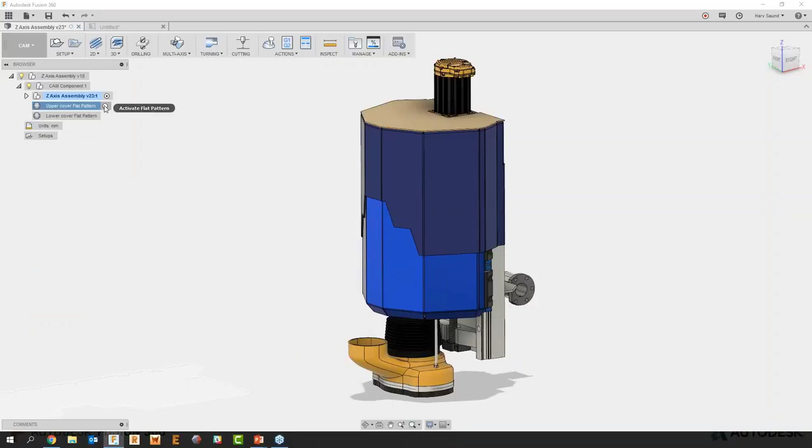Now our CAM environment allows us to go ahead and pick up on flat patterns. It gives us the ability to choose the flat pattern that we want to cut. For this example, I'm going to use the upper cover flat pattern. If I activate that, it will activate that flat pattern within the CAM workspace, and from here I can start to specify the setup for that design.

We can see that all the bend lines and bits and pieces are taken into account. We can increase the size of that setup. If you're doing this as a nest, we can look at creating multiples of these and start nesting them manually, specifying the origin. All we then need to do is specify the cutting parameters.

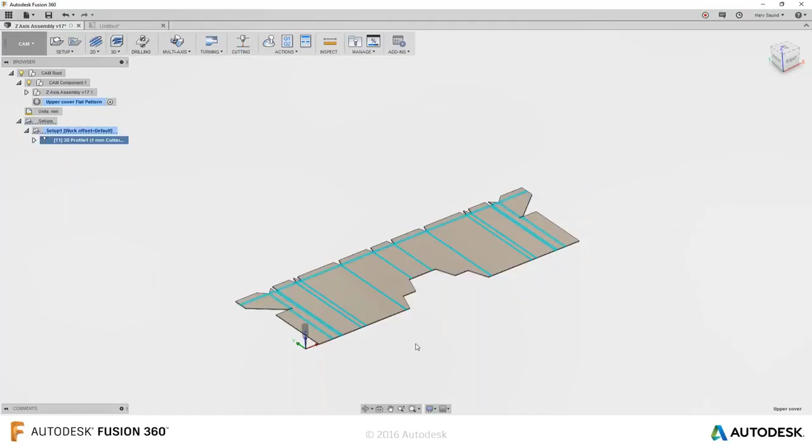Under our cutting tools, we can specify the kerf width we're going to be using. I'm using a water jet here, so once the kerf width is set, which is 1 millimeter for my design, all I need to do is pick up on the contour - that's the outside edge of the design. We can specify any internal details as well at the same time, and Fusion will then generate all of the 2D toolpaths that we need.

So if I just wind the speed up and specify to play through, we'll rotate around slightly, and as you can see, it's going to cut all of that information for us.

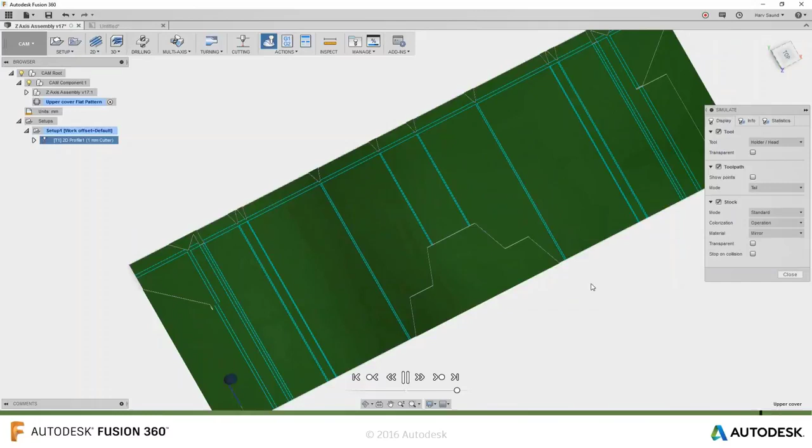At this stage, we're not going ahead and resigning ourselves to pushing this out to someone else to do - we can actually generate all that G code and toolpath directly within Fusion itself. We have some standard posts that ship within Fusion, so you can quickly and easily pick up on the post if it exists within Fusion, and then post out. So that's all the G code taken into account.

Or we can go ahead and find that at cam.autodesk.com - there are a few posts on there that you can use as well. So really quickly and easily, we can take that design from art to part.

So what we've looked at is that new functionality, sheet metal within Fusion 360: having the ability to quickly and easily create a sheet metal component off of sketches, generate flanges and specify the end conditions for those flanges, adjust those, put standard methods such as sketches in and cut certain areas of those flanges. We can quickly look at how we change those rules, how we create the flat patterns, unfold a single flange or a single bend, and create options there.

We can then move this into the communication environment, where we can communicate that design with whoever we need, whether that's manufacturing or an outside subcontractor. Move this into simulation, where we can look at simulating that design and validating it prior to manufacturing anything. Moving this into our drawing environment, creating a flat pattern drawing with our bend tables, looking at rendering this for visuals for a client, and then finally generating the part from either a laser, a plasma, or a water jet cut method.

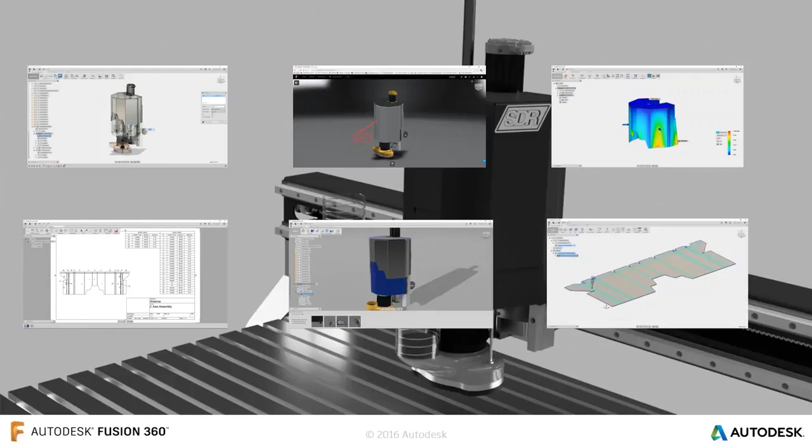Now, just before I end the webinar, I just wanted to focus in on a couple of the previews that have been released within the August release as well. One of them being ECAD to MCAD integration. So this is, again, part of the August release that has just happened.

It's just a very quick ECAD to MCAD environment that we now have within Fusion 360. Now, as we already know, products are changing, so we're starting to put PCBs and bits and pieces into parts.

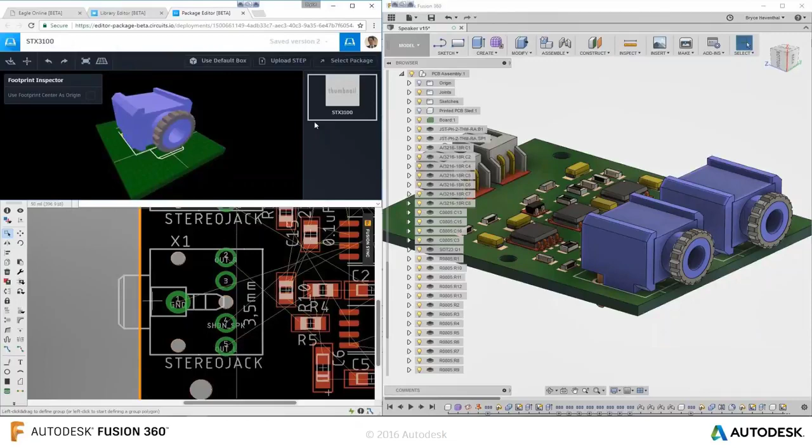Directly within Fusion now, we can go ahead and specify a PCB layout by specifying a sketch. Using our Eagle tool, we can quickly and easily specify that board layout, push it from Fusion to Eagle, and then start to specify that overall board layout. Using the 3D libraries, we can build that PCB in 3D, which gives us the ability to quickly check for interferences with designs.

If we need to make any adjustments to the PCB, we can make those adjustments live within 3D. We can find those interferences and then pull that design directly from Fusion into Eagle to reset that board, giving us the ability to have a more integrated environment between ECAD and MCAD, with the ability to run thermal simulations or even CAM on the PCB. So really quickly and easily, we can have all of that as a complete integrated ECAD to MCAD environment directly within Fusion itself.

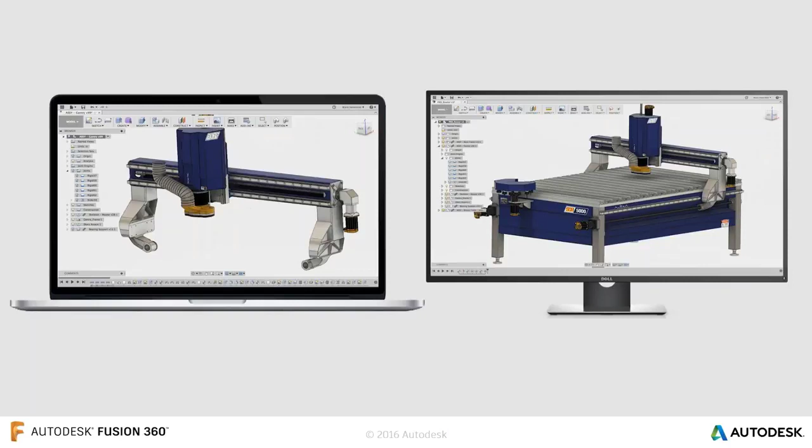And the other preview that was released within that August 8th release is the browser version of Fusion. We've been pushing the boundaries for a few years now with hardware, so not having to just run on a Windows machine, we can also run Fusion on a Mac. But we now have the ability to run within the browser.

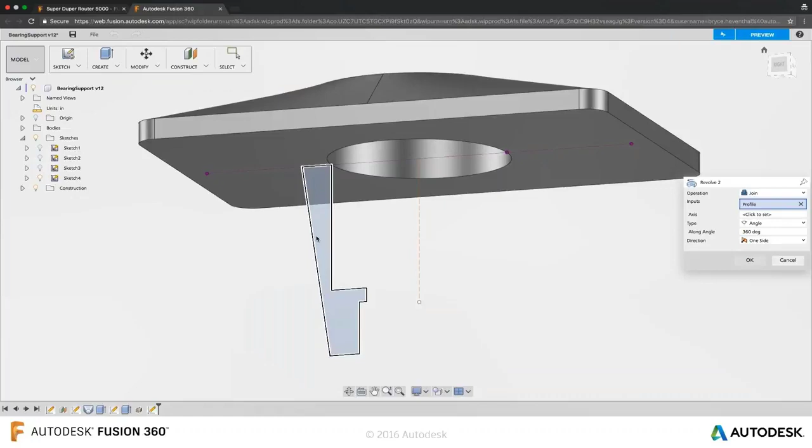Now it's limited functionality - it sketches, extrudes, cuts - but it gives you the ability, if you're with a client or want to make some very small changes to a design, to quickly and easily do that directly within a browser. You can launch any of your designs from A360 or Fusion Team directly within the browser itself.

It's just a click on a point within the environment itself, which I'll show you, and you can start to generate a design or make some changes to a design or a very quick concept directly within the browser. Now, when you're ready, you can start to look at adjusting features, but also pushing this design back into your desktop.

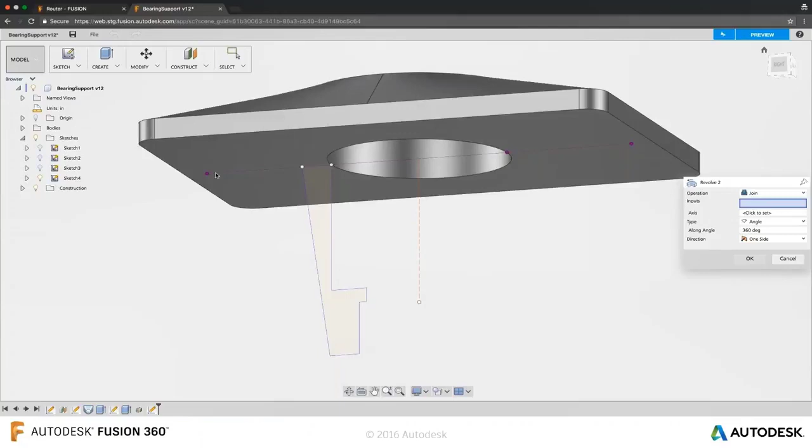So if you're out and you only have something like a Chromebook, you can go ahead and make those modifications within the browser. But then, once you're back at your desk, you can also push that design from browser directly into a desktop application as well, or desktop Fusion. So it gives you the ability and the flexibility to use Fusion wherever you are. Again, coming back to that point initially where I said accessibility anywhere.

As you can see at the top, pick a design, edit in browser or desktop within the actual web interface. So a very quick and easy way of looking at a different way of designing within Fusion. Again, those are the couple of previews that were released within the August 8th release.

You can activate them from the Preferences tab in the top right hand corner of Fusion under your name or your user. Hit Preferences and then you'll see at the end of it a Previews tab, just there. So it gives you the ability to go ahead and look at those as well. Again, those are from customer enhancement requests.

So again, pop up to Idea Station on Fusion itself, and we can quickly and easily look at implementing the ones that we need. We implore you guys to give us an idea on what you want from Fusion itself. And with that, we actually publish our roadmap live, so you guys can see what we're working on in development for this year and where we're going to focus our efforts.

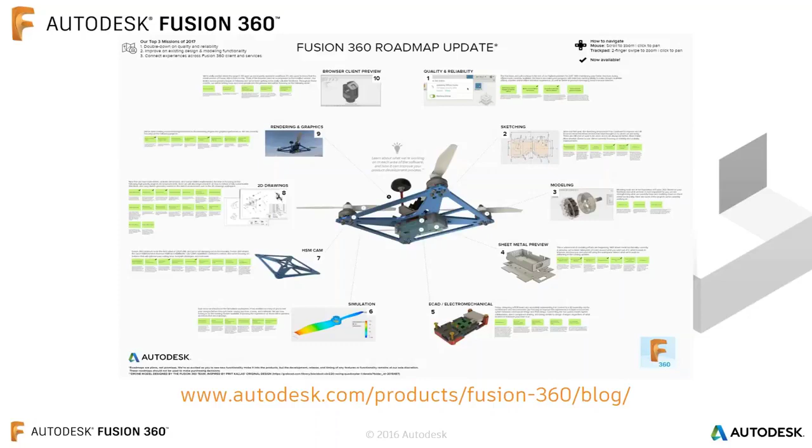So there's a lot on 2D drawings, some stuff on ECAD/MCAD which we've released, stuff on sheet metal and simulation. And if there are ideas that you guys have, you can go to fusion360.com and under community, you'll see Idea Station. Raise an idea - every idea is taken seriously, so you guys can go ahead and see those.